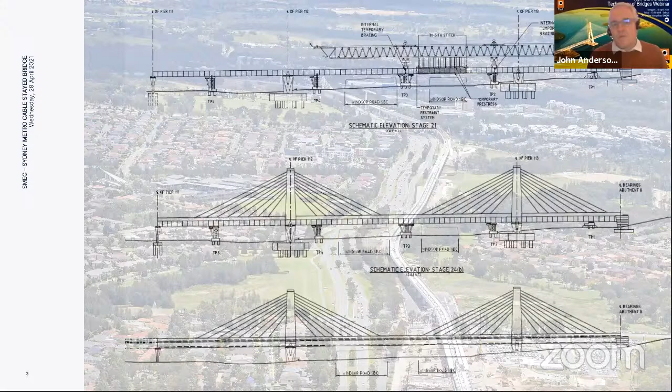The cable stayed bridge is actually part of a much larger project. The clients in Sydney have developed, have extended the metro from the centre of Sydney out to the northwest, and the project at one stage was the largest civil engineering job in Australia, and it included tunnels and this viaduct, which is about 4.5 kilometers long, that leads up to the cable stayed bridge itself.

The approach viaduct to the cable stayed bridge is your normal simply supported spans and a number of continuous spans. They're 2.5 meter deep precast segments, and they're built with an overhead gantry. And the contractor actually used a fairly massive gantry that could allow them to construct the 3-span continuous system as well.

But the requirement for a long span crossing was actually an alternative in the design and build tender. Contractors had to price both the conventional structural system with the simply supported spans, and then also develop a long span option.

And the contractor that we worked for, one of their key strategic objectives was to build the cable stayed bridge using the same overhead gantry that was going to be used to build the simply supported span. And in the end, that decision was the winning factor in the tender.

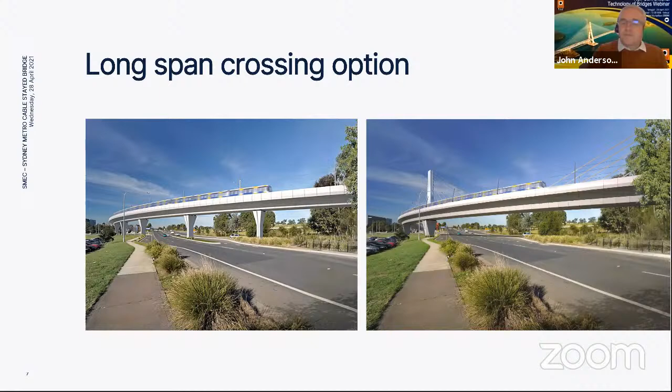So today I'm just going to go through some of the design challenges with the permanent works, and then also just talk a little bit about the construction sequence and how that actually informed design itself.

So general advice is perhaps stay away from cable-stayed rail bridges and stay away from curved cable-stayed bridges. This bridge combined both. There was no real alternative given the alignment of the rail was set. But with any rail bridge, you need a stiff deck, obviously, to limit deflection, to limit the rail stresses. And that could be a challenge with a cable-stayed structure, which generally has a flexible deck.

So the structural system is an extradosed bridge with a stiff deck, and that stiff deck helps you to limit the deflection of the bridge itself, and as I say, limit the rail stresses and the tolerances on the rolling stock.

Part of the performance objectives or the design requirements for the bridge was that the deflections actually had to be limited under rail loading to less than span over 950, which is fairly tight for any suspended cable-stayed bridge.

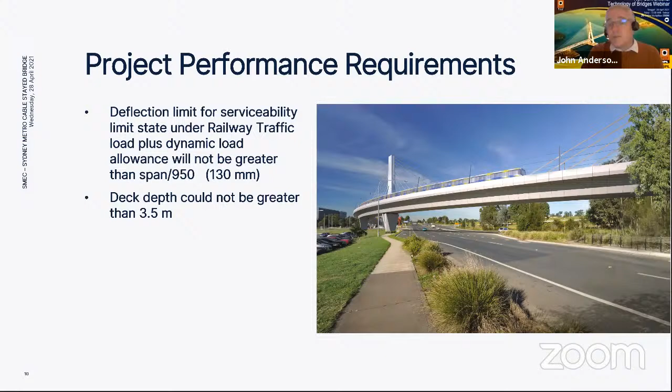The other big constraint we faced was from the urban designers, and the need to limit the deck depth to 3.5 meters. Given it's a busy urban area, they wanted to limit the visual impact of the bridge itself. But this constraint proved very difficult for the designers, mainly because of the magnitude of the rail load and the magnitude of the superimposed dead loads that you often get with rail structures.

So in a conventional cable-stayed bridge, it's the cable stays themselves that often provide the stiffness in the structure. Most of the load finds its way to the cables and to the pylon. You have local bending effects in the deck. So obviously that structural system is not suitable for a rail structure.

So with the rail structure, you have a much stiffer deck, but when you combine a stiff deck with cables, then the sharing of the load between the stiff deck and the cables themselves becomes a little bit more complex. Generally what happens is with these stiffer decks that you can build the bridge in such a way that the cables take the dead load of the deck, but when you apply live load to the structural system, the girder is far stiffer and therefore attracts the majority of the live load effects.

And typical span to depth ratio on a constant depth extradosed bridge would be span over 35. So for the Northwest Rail Bridge, that would be a deck depth of about 3.7 meters. So although 3.5 is relatively close, I think these limits are generally developed for road highway structures. And when you have rail structures, the live loading component is fairly onerous. And as I mentioned, the superimposed dead load was fairly onerous.

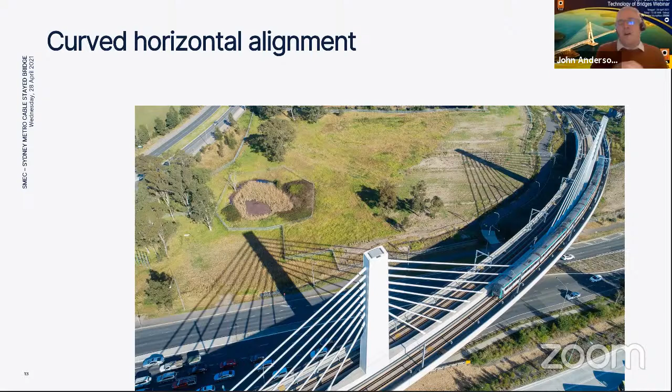So the cables followed the alignment of the bridge. They're therefore not in a single plane, they're splaying, and this introduces lateral horizontal reactions at the anchorages in the pylon, which then introduces a permanent transverse bending in the pylon. This is far from ideal to have this permanent effect within the pylon, and it becomes critical to limit the amount of transverse bending generated in that pylon.

Through the tender design process, we found that we were struggling to get the deck section to have sufficient capacity at ULS, and also to prevent tensile stresses developing in the precast segments at SLS. In a rail structure, you're required to maintain a minimum of 1 MPa across all joints.

And then the other challenge that we had was limiting the transverse moments in the pylon, and then limiting the transverse deflection of the pylon, because as it deflected, it introduced second order effects into that system and magnified those transverse moments being applied to the pylon.

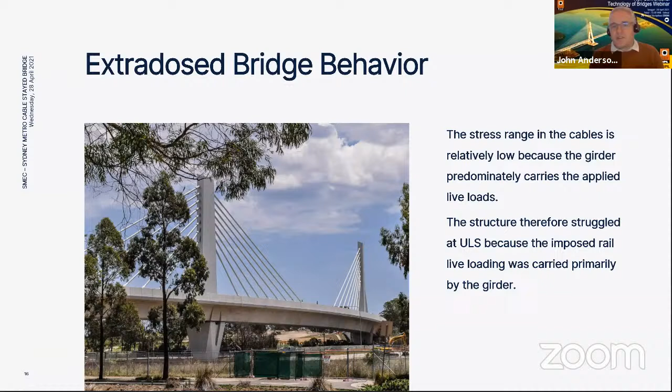Now, obviously, the stiff deck helps limit deflections, but the downside is it's also attracting load, and this became a real problem in terms of finding sufficient capacity within the deck section itself. So we had to find solutions for attracting more load to the cables and away from the deck section to actually get the structure to work.

This required a number of unconventional approaches, one of which was to increase the stiffness of the cable stays themselves, which essentially means using larger cables. By using larger cables, we attracted load away from the deck and towards the pylon. But that was a double-edged sword in some respects, because the more load we attract towards the pylon, the greater the transverse effects in that pylon.

There was a very definite limit on the amount of transverse load effects we could take in the pylon. Obviously, another way to get more load into the cable stay system is to increase the height of the pylon, but again that was counterproductive, because the higher the pylon, the larger the transverse bending moments. So we were stuck with this balance between attracting load to the pylon but not increasing the height of the pylon itself.

The first option we investigated was increasing the capacity of the box section. We weren't allowed to increase the height of the box section itself, so we came up with the idea of introducing a central web with a concrete fin that projected above the box section to give it some additional stiffness.

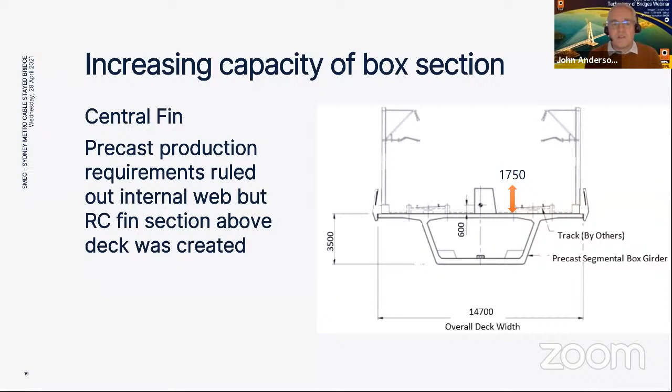But this was a design and build job, and the contractor was not keen on any solution that interfered with the precast segmental production cycle. This central web was obviously something that would do that. So in the end, we had to develop a solution where we had the fin projecting above the deck level, but got rid of the central web. The question then becomes, is that fin going to be effective within the section? Is it actually going to meaningfully increase the stiffness of the section?

The way we investigated that was with a brick model of the deck section, and what we found was that the fin was effective. It meaningfully increased the stiffness of the deck section.

The reason for that is when you have precast segmental construction, you're required to have compression across the joints. So the section itself was always in compression, even under live load effects.

This meant there were minimal shear lag effects within the deck section, and this isolated fin in the middle of the deck was actually fully effective and meaningfully increased the stiffness of it.

So this was a nice benefit of the precast segmental construction design process.

Another idea we had was to put the anchorage, the deck anchorage, the cable anchorage in the deck eccentric to the center line of the deck section.

We moved the anchorage 500 millimeters to the outside of the curve. What this did was reduce the overall resultant horizontal effects applied to the pylon, and therefore reduced the bending moments of the pylon.

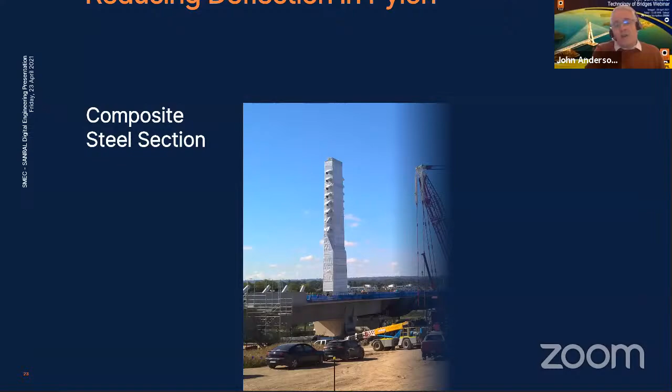Just to talk a little about the pylon itself: it was fabricated as a structural steel section, and this was done really for production reasons.

As we were building the girder, we could build the pylon. It's a 28-meter high section, and it was transported and erected on-site with this crane.

What we did is fill the bottom half of the pylon with concrete, creating a composite section. The big benefit of that composite section was its stiffness, as a composite steel section was far stiffer than a pure steel section.

That stiffness helped limit the transverse deflection of the pylon, and then helped limit the second order effects, which had a big benefit.

The fact that the transverse bending moments were permanent effects meant there would be some concern about just using a standard concrete section and the creep of that concrete over time.

Those concerns were allayed by essentially using a steel section, and then the stiffness of that steel section was augmented by filling the bottom half of the pylon with concrete.

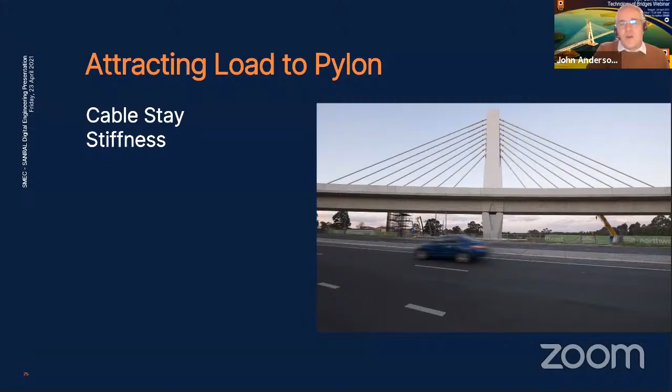Just to go back to what I mentioned about changing the cable stiffness and how that affected the behavior of this extradosed bridge: during the design stage we did a sort of optimization study looking at the impact of increasing the cable area.

The largest cable stay you can get is a 185 strand cable, a fairly massive unit, so the first option was just to use the largest cable we could.

Then we looked at a second option, reducing those cables down to 169 strands just on the outer two cables, which take most of the load, and reducing the size of the remaining cables that fan towards the pylon.

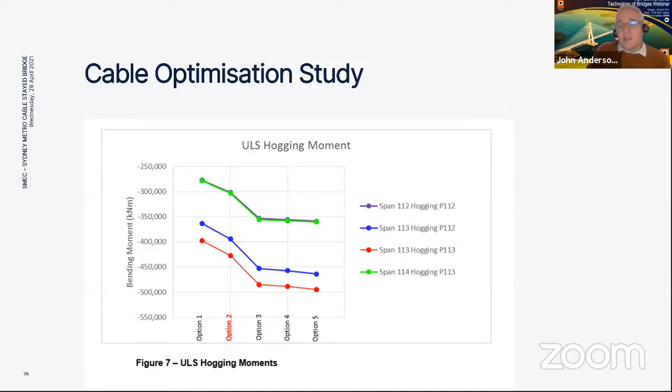So I'm now just quickly going to go on and talk a little about the construction and erection engineering, because that informs so much of the design—the way we built it really drove the whole detailed design. Just to familiarize yourself, because I'm going to show you a number of slides in terms of how we built it.

We've got the main piers, Pier 112 and Pier 113, and then the pier adjacent to the main viaduct, 111. And then those TP1 to TP5 are the temporary piers that we introduced while we were building it.

These temporary piers were instrumental in allowing us to use the overhead gantry. Obviously the gantry's got to jump from one hard spot to the other. By using these temporary piers, we were able to build the continuous girder with the precast segments first, and then later converted into the cable stay bridge. You can see the sort of Windsor Road clearance envelope there.

During the construction process, the road remained open. We lifted segments at night and only closed the road for a limited period between 12 and 4 o'clock in the morning.

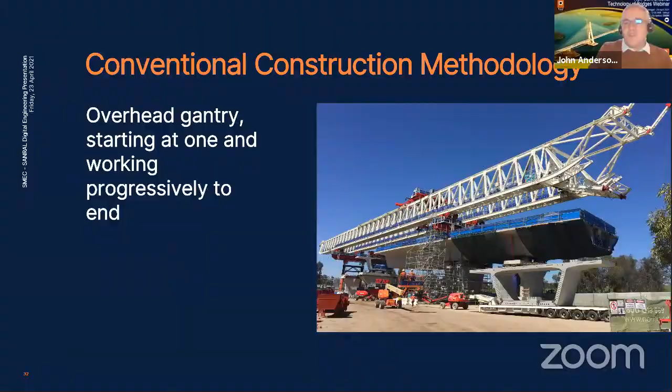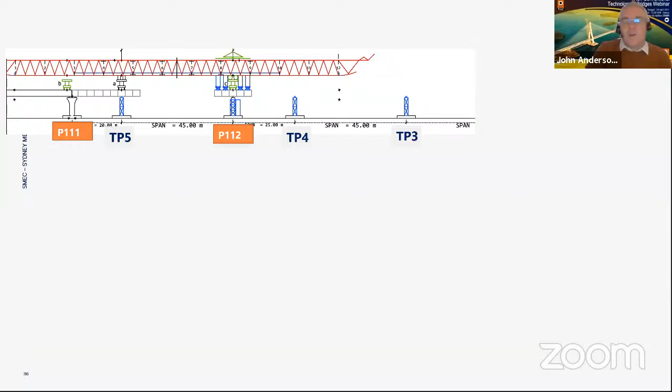So there you go, Pier 111 at the end of the main viaduct. The gantry jumps forward onto those hard supports. You have infill segments on either side of TP5, and then the gantry jumps and creates a small cantilever section at Pier 112, the length of that cantilever being set by the length of the temporary span. Then you have your infill sections, and that section progresses forward. Again at TP3, you have a small cantilever set by the length of the span between TP3 and TP4, with infill segments, etc. The gantry can progress from one end to the other.

Now, we tried that, but what happened was that the pre-stress you need for the construction stage proved detrimental in the final stage. The fact that we were building these small cantilevers, putting the pre-stressing in, and then subsequently converting the bridge into a cable stayed bridge meant that we had undesirable peaks in the pre-stressing—higher compressive stress and lower, and tension in the deck section. So there was no way we could start at one end and go to the other.

We had to find a different construction method that mimicked the behavior of the permanent works rather than the temporary state, because there was no way that we could detension. So I'm going to run through this very quickly.

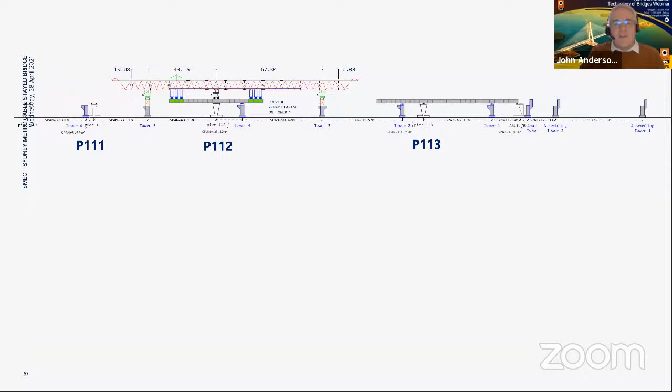In the end, what we did was start at Pier 113 and build a very long cantilever to start with, getting the pre-stressing in for that. Then we finished the back spans and drove the gantry back across the road. We then built a very long cantilever at Pier 112, finished the back spans, and then came across and finished the main bridge. The big benefit of that was the pre-stressing needed for these long cantilevers was effective in the permanent state when we converted the bridge into a cable stayed bridge.

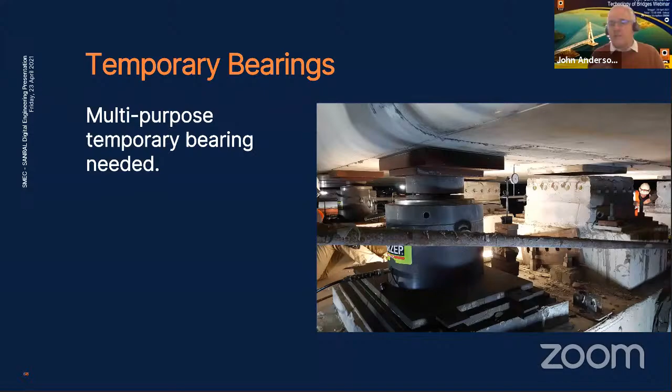Just a little bit of insight into the construction engineering, very complex, over 110 construction stages. During that construction, the bearings had to be multi-purpose. They had to be fixed, they had to slide, so they had to change their function. What we did is we had jacks sitting on sliding pads, and we created these plinths, with plates bolted to the underside of the deck that could clamp around the plinth. So we could have it fully fixed longitudinally or fixed transversely, changing the functionality of those temporary bearings relatively quickly.

Just going to skip that. So the fin itself was quite a complex element. Because it's quite a narrow element, it attracted peak tensile and compressive stresses, so it was packed with reinforcement, and we had to use self-compacting concrete.

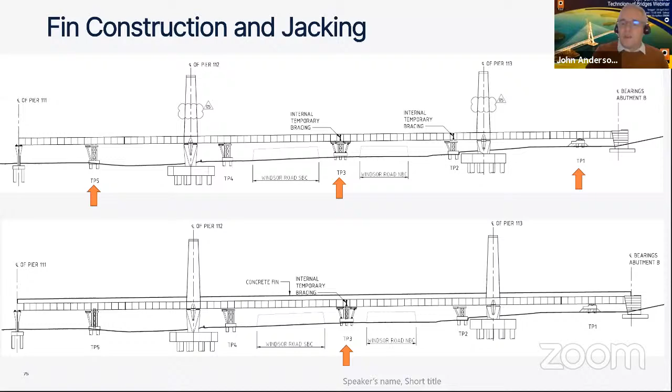But one thing we had to do was, because it was reinforced and the rest of the deck was precast and pre-stressed, we had quite a big stress differential in the composite section. So we had to jack the deck upwards before we cast the fin to improve that stress profile, and then after we cast the fin, we jacked the deck up again so that we got relieving effects in the fin. One important point is, with the extradosed bridge, you cannot change the geometry by stressing the cables. The only way you can do it is by jacking the deck up and shortening the cables.

This jacking operation also had big benefits in that it was one way we could increase the reaction at the temporary support, and by doing so, we were able to get more load into the cable. That became a big part of our construction methodology.

So in the end, it looks a very simple bridge, but its construction methodology made it actually very complex. We're very proud of the way the bridge looks, and its complexity is sort of hidden within it. So that's everything. Thank you very much.

Thank you very much, John. It's really interesting. As you mentioned, it looks like not so much technology sophisticated in terms of the span, because it's not too long, but in terms of complexity it's really, I don't know what to call it, a cable-stay hybrid, because this is the hybrid between the cable stay and the precast concrete put together. Very interesting. So John, we will hold all the questions later on after all the speakers finish with the presentation.

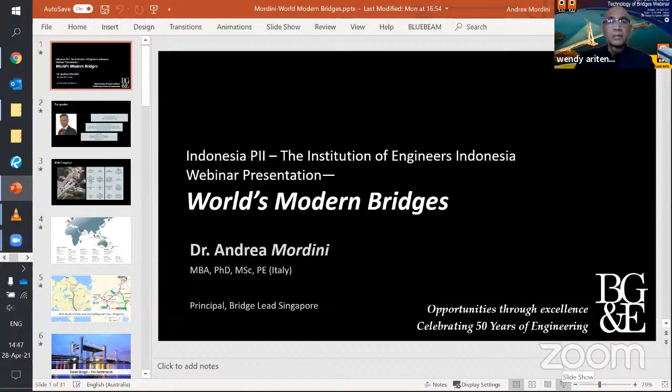Okay, thank you. First of all, I want to thank Mr. Chairman, Mr. Bang Bang, and the moderators, Mr. Aritenang and Bibi, you will forgive my pronunciation, and a special thanks also to the Institution of Engineers in Indonesia for giving me the chance to present some of my experience in bridge engineering and construction.

This is me. I'm originally Italian, and I was lucky enough to have experience in interesting projects in a number of countries. I will take you today on a trip, and I will show you three different bridges, each with different challenges. I'm currently based in Singapore, where I lead the bridge team for BG&E, International Consulting Engineers.

A couple of words about the company. BG&E is an Australian-founded company, and nowadays we have accumulated more than 50 years of experience, and we count more than 700 employees. Of these, about 150 are bridge engineers. We are originally an Australian company, but we have expanded our international footprint with 11 international offices, from London, Middle East, Singapore, and then of course our stronghold in Australia, all the way to New Zealand. We are also active on the Indonesian market, currently with some projects, and we went through the local registration process.

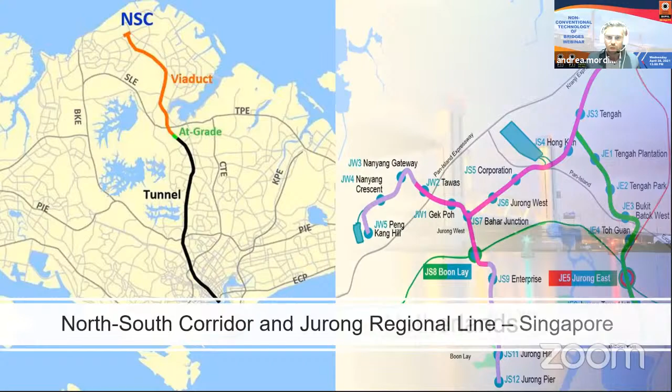The Botlek Bridge is one of the largest movable bridges in the world. We are talking of two steel decks with a span of 92 meters, for a structural steel weight of 3,600 tons each. Each deck can go up in the air about 45 meters.

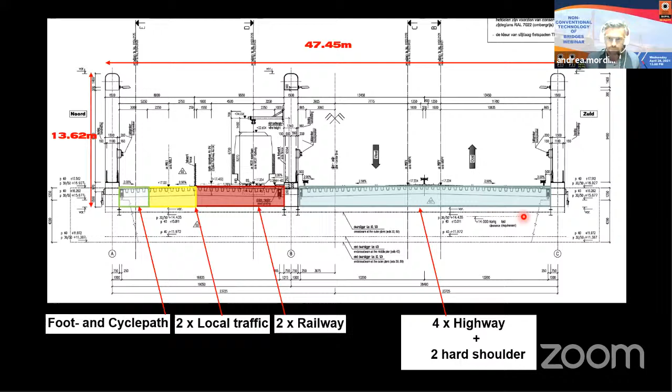Some other challenges I can mention: the bridge was designed and built with a mix of national codes and the Eurocodes. It was necessary to integrate different requirements from different stakeholders - the owner of the waterway, the owner of the highway, the owner of the railway. We also had very strict requirements regarding reliability, with high non-performance penalties in the range of 100,000 euros per 50 minutes per lane.

So if you close a lane for 50 minutes, you have to pay 100,000 euros, and there's a quite short opening and closing time of 90 seconds, which may look long, but when you have to move 5,000 tons of permanent weight up in the air, I'm sure the mechanics behind it, the M&E component, is quite challenging.

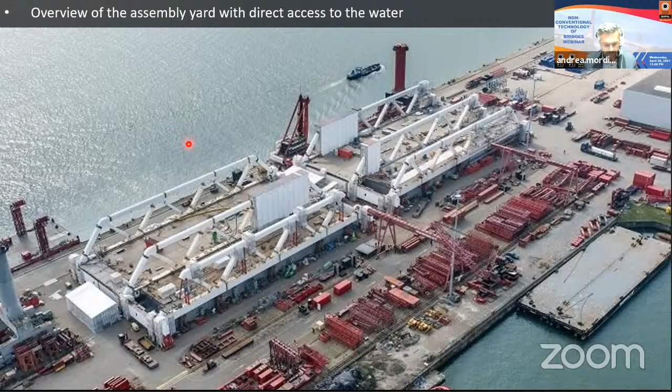And the importance of this, I will try to show you now in a video. Let me try to get out. Okay, I have the video ready here.

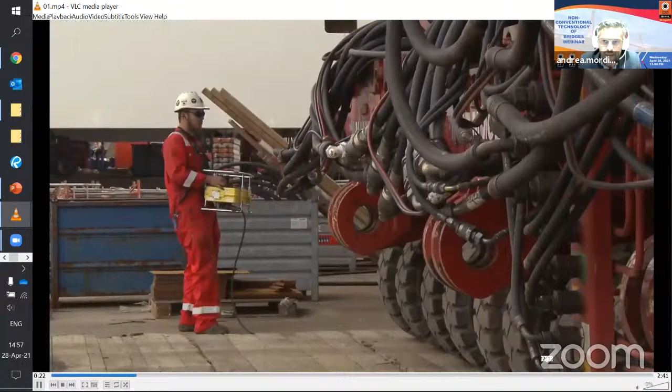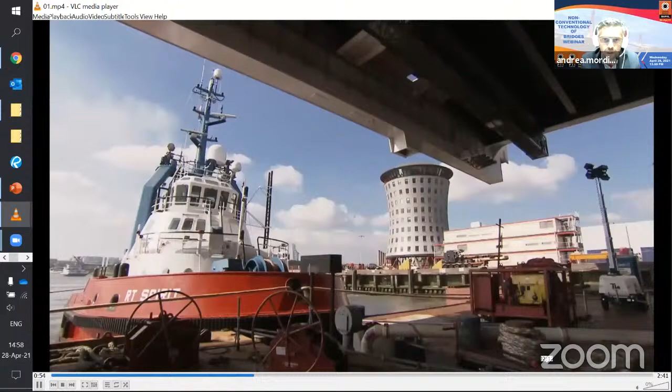This is the deck that has been completed and assembled. As a first step, it has been jacked up, and a multi-wheeler has been slid under it. Then slowly, the deck started moving towards the water, where a barge was located. The operation was very slow because the barge has to compensate for the load coming in from the deck—this is, of course, a time lapse. Now the deck is fully on the barge, and the barge can move towards the end destination, which is just a few kilometers away.

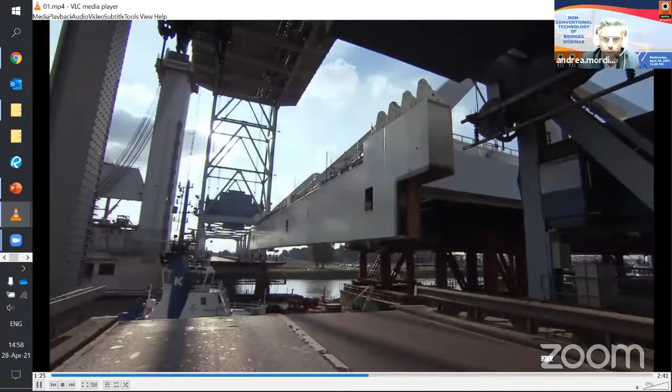Before being installed, there is another challenge: the deck has to pass through the old bridge, which has a smaller span than the previous one. So the old bridge is opened and the deck is moved past through. It's a quite complicated operation, considering the clearance on both sides is less than 500 millimeters. Even a part of the bridge—an edge—is missing, as you'll see, and it has been installed afterwards.

Now the deck is fully on the other side, and it has been rotated, and now it is in position, ready to be installed in its final position—another quite watchmaking operation, fitting half a football field between the piers.

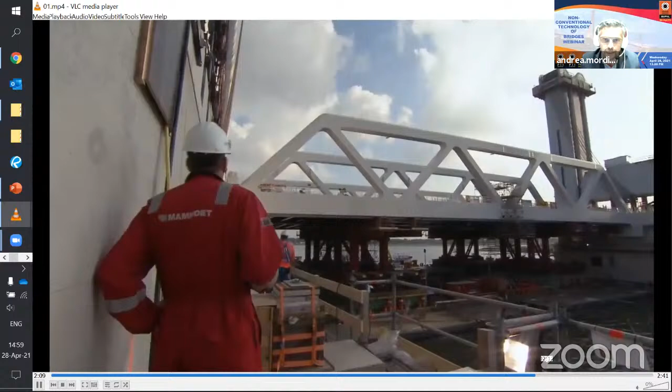You see here that an edge of the deck is missing—those are the latches to connect to the cables, because there was a very limited time window to perform this operation, and then immediately the deck has to go up in the air to free the waterway.

And yeah, this is the completion of the operations. Let me go back to my presentation. After the installation, there was a testing period. You see here both decks are up in the air with some ballast, because the full permanent load must already be on the deck, because of the full balance system. And this is the completed bridge as it is today.

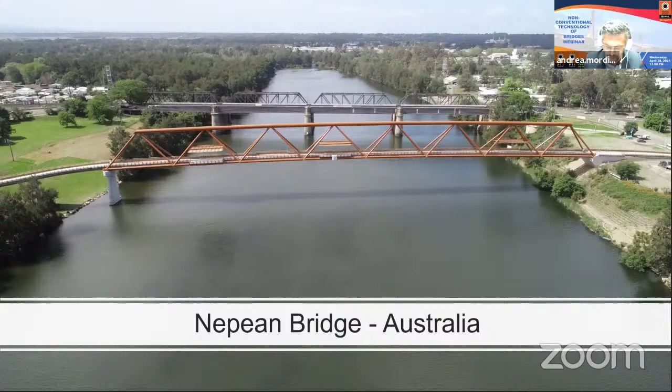After this movable bridge, we fly all the way to Australia. We talk of the Nepean Bridge. The Nepean Bridge is a shared path, cyclist plus pedestrian bridge. It's part of the Great Western Highway project, and in this case, BHNE was the detailed designer for the authority.

To overcome some constraints on the site, we developed a quite interesting concept for the launching. The bridge has a clear span of 200 meters, and it is a truss bridge. We know that trusses work well when they are supported at their nodes. But this is exactly the opposite of what happens when you launch a bridge, because when you launch a bridge, the deck is supported at each and every point in a different moment as you slide the bridge.

So to avoid this unfavorable load support configuration, BHNE has developed a system whereby the deck is supported at the node, and instead of sliding the deck with respect to the support, the support will be fixedly connected to the deck at that point, and the support itself will slide on the tower. It's not by chance that the length of the tower is exactly the distance between two nodes, and also the distance between the towers in the river is actually exactly the distance between two nodes.

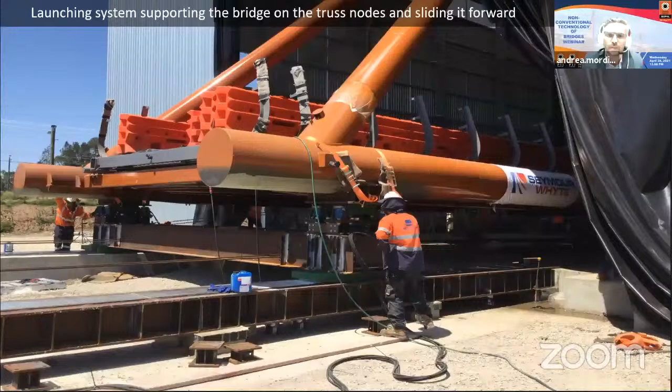Let's have a closer look at this system. This is the first segment that has been launched, and you see the system works like this: here we have jacks to engage this bearing, and this system of bearing and jacks will be fixedly connected to this node. Then the bearings are connected to this crossbeam, and the crossbeam will slide on this rail. Same view from another perspective of the same system.

This is the end of the launch—we are at the last segment—but this mechanism is repeated all along the bridge for the entire 200 meters.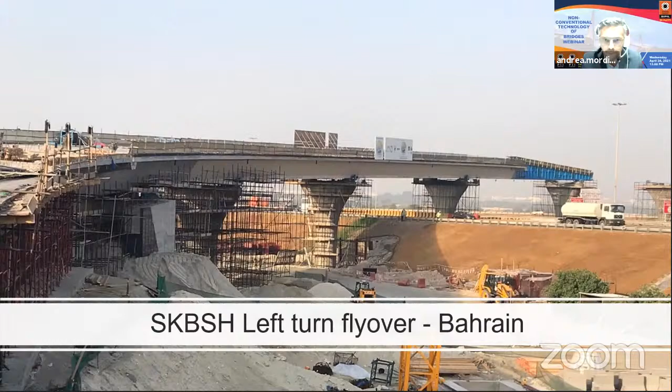14 total number of spans. VCE in this case has performed the detailed design of the bridge and the casting yard, including the geometry segmentation and the construction engineering during launching.

I want to focus for a moment on the segmentation part, because the geometry of the bridge is actually very complicated, as we have a double curvature. Of course we have a curvature in plan, as you can see on the left side, but we also have another curvature in elevation, because the flyover starts with a low point, goes all the way up, and then goes down. So this is the geometry in the 3D view of the alignment, and this has been translated into the geometry of the deck with multiple cross-sections taken along the alignment.

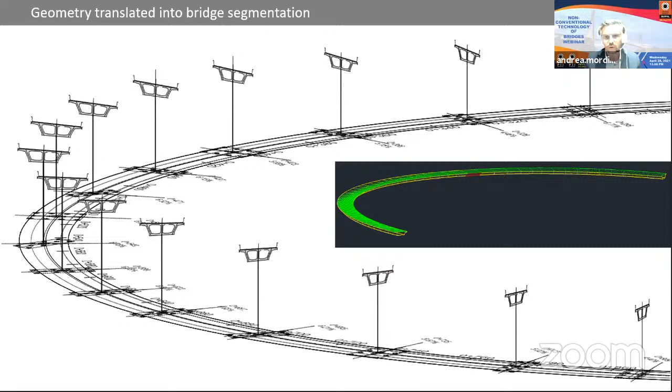If we look more into the cross-section, we have to notice a couple of things. The first is that the client dictated a variable crossfall on the ramp, and this means that it had to be taken into account already in the casting yard. To obtain the final right geometry, our drafting team had to prepare one section for each meter to provide the longitudinal variation of the crossfall.

The other thing that the client dictated was the use of a double cell. You can see that the width of the deck is quite conventional, and the width of the cantilever is not extreme. We actually recommended the use of a single cell, but the client wanted to use a double cell, partly justified by the very strict requirement we had to apply, since a crack width of 0.1 millimeters was adopted for this contract, which is quite strict.

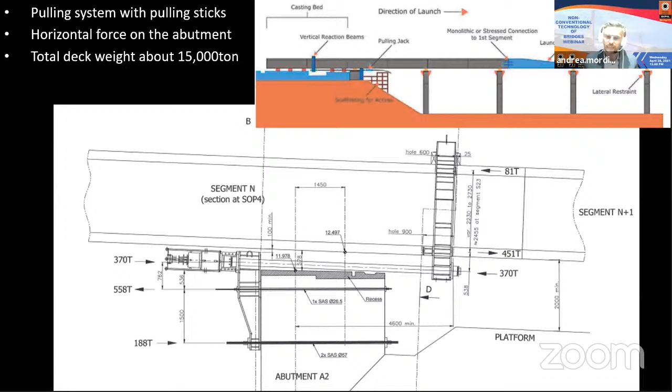What happens is that the jack pulls on this side, and through these tendons, the pulling force is transferred to the pulling sticks and then toward the deck. Of course you have a relevant force introduced into the abutment, and as depicted here, also a relevant push and pull action inside the top and bottom slab of the bridge.

And since we have a launching system, there is something moving, so let's try to have a look again at the video.

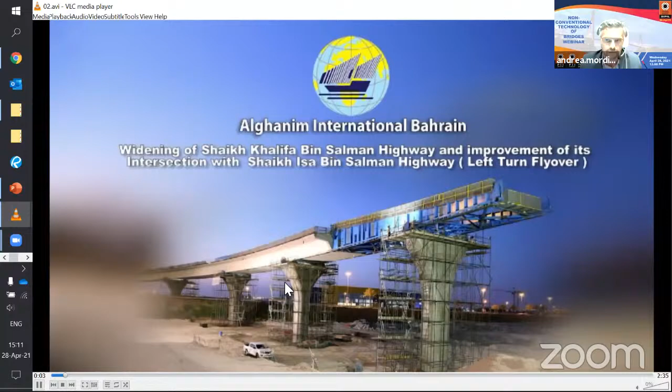All right, here is an overview of the site. The launching operation started usually in the evening and was performed during night. This, of course, is not the first segment. You see that the earlier part has already been launched.

This is a close view of the jacking system, and you see that the launching is performed above live traffic. Here are the last measurements and checks before the beginning of the operation.

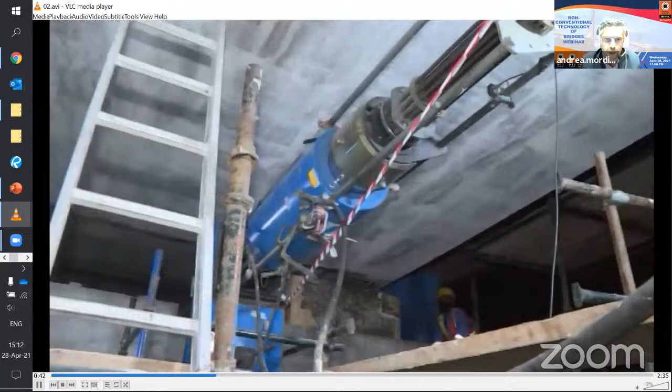Here is a closer view and preparation of the pulling system. And finally, we start. You see that the jacks are pulling and the bridge is moving on top.

Once the stroke is completed, you see that the tendons will become sagging. This is an overview of the pulling stick coming down from the top of the deck, and you see the bridge moving. This is a temporary bearing, the temporary support in the casting yard.

And here, if you focus on the bridge, is a time lapse. You see the bridge moving step by step. Of course, it's not a continuous movement, but each time the bridge will move according to the maximum stroke of the jacks.

Here is some other time lapse. You see the bridge is still advancing. Here you have another step, and the operation went on and on for several hours. You see now it's already early morning hours, and the operations are nearly completed.

And here you are now, it's a full day, and this is the final configuration of the bridge for the casting of this specific segment.

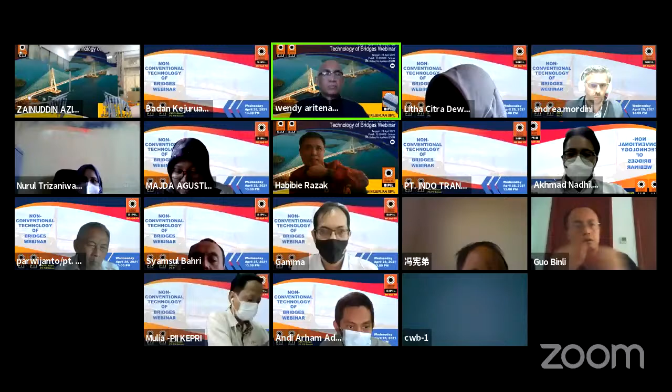Mr. Guo Binli, are you still muted? Now it's okay? Now we can hear you. Okay. But now we don't have your presentation yet. Just a moment, we'll share the screen.

The Arkadiko Bridge in Greece is the existing oldest bridge, with a history of about 3,000 years. Zhaozhou Bridge is the oldest bridge in China now. Luding Bridge in China is the first 100-meter scale bridge in the world. And the George Washington Bridge, USA, is the first 1,000 meter scale bridge in the world. We all know that there are four basic bridge forms.

Mr. Guo Binli, you're still muted. Because it looks as if we have a connection problem with you, because we cannot hear you and it's interrupted many times. So I would like to suggest that we continue with more speakers while you try to fix your connection problem.

Oh, he's already here. Oh, you're already here? Okay, the slides are already shown. Okay. Sorry, some problem with my net. Yeah, please continue. Okay, now let's continue.

This table shows the top 10 long span concrete span bridges, and there are 4... there are 5 bridges in China.

The second is about arch bridges. Arch bridges have a history of over 3,000 years. This is the evolution of the longest span of arch bridges. It can be found that the longest span only increased 14 meters from 1931 to 1977, but it increased rapidly in recent years.

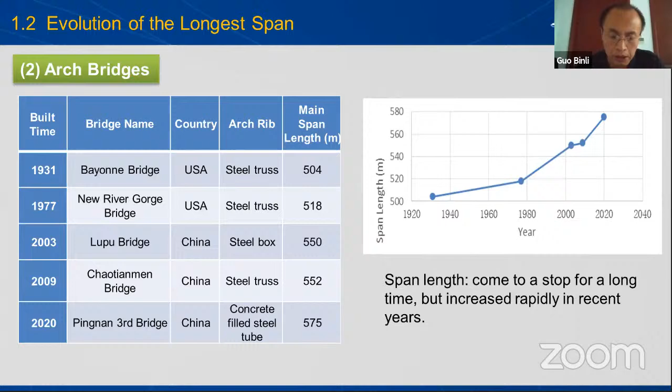The third one is about suspension bridges. The suspension bridge is an ancient bridge form, but the long span suspension bridges were developed with the increase of material performances of steel after the late 19th century.

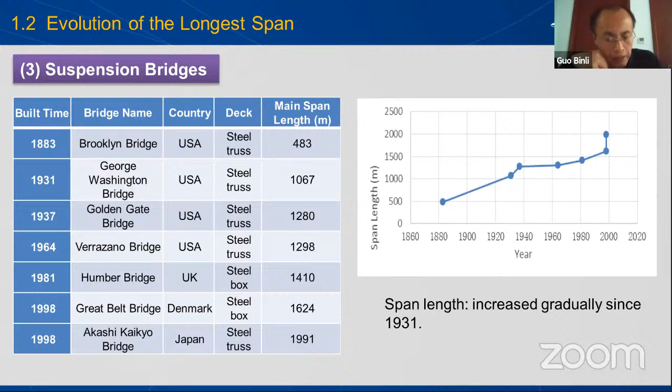This is the evolution of span lengths of suspension bridges. It can be found that the longest span reached over 1,000 in 1931 and increased gradually since then. And the table is the top 10 long span suspension bridges.

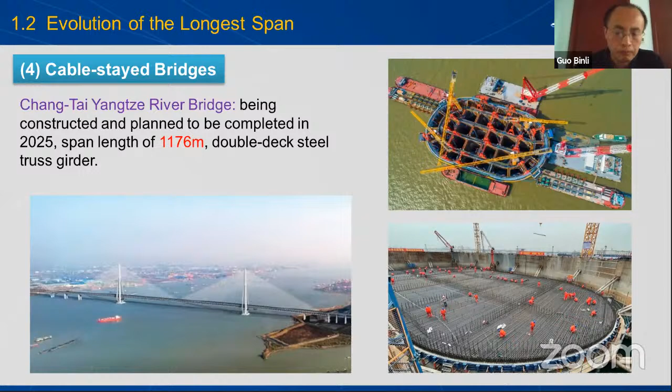Part 2 is challenges and the engineering approaches for longer spans. First, talk about beam bridges. For beam bridges, the maximum negative bending moment will control the longer span.

And we can also adopt concrete and steel hybrid girder. Shibanpo Bridge in China, the old bridge is a PC continuous rigid frame bridge. Besides the old bridge, a new bridge is built, and the maximum length is 330 meters.

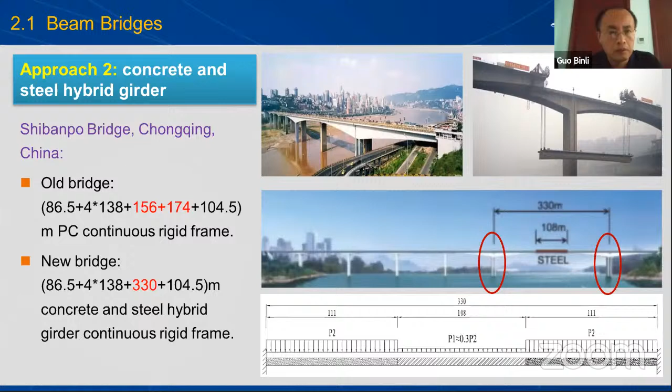Another approach is adopting the extradosed cable stay bridge. The extradosed cable stay bridge is a hybrid between beam bridge and the ordinary cable stay bridge. With the help of steel cables, it can reach longer span with smaller girder depths.

The second bridge type is arch bridges. One challenge here is the buckling stability of arch rib for longer span. With the increase of span length, calculation length, and compressive stress of arch rib shows the increase with span length. Especially for both general and local stability, it is not good.

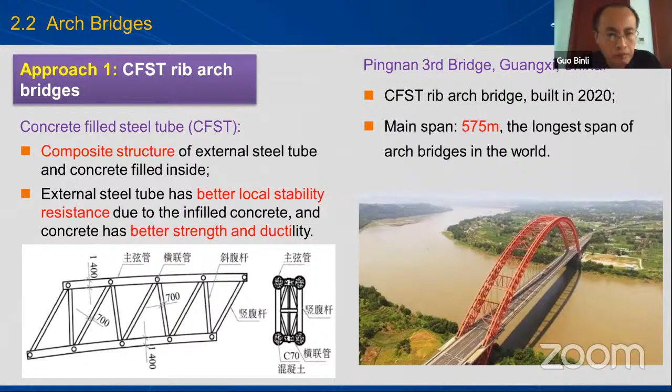Its construction includes first cantilever installing the steel tube rib with the help of temporary steel cables to form the steel tube arch. Then fill concrete into the steel tubes in batches to form the concrete-filled steel tube composite arch. Then construct columns, suspenders, and decks supported by the arch rib to form the concrete-filled steel tube arch bridge.

Another approach is concrete-filled steel tube stiffened concrete rib arch bridges. CFST stiffened concrete was first used in China as the stiff skeleton to build concrete arch bridges.

The picture is the Beipan River Bridge in Guizhou, China. It was built in 2015. Its max span length is 445 meters.

Construction of the steel stiff skeleton. They fill concrete in the tubes to form the concrete-filled steel tube stiff skeleton. Then install formwork supported by the CFST stiff skeleton. Then cast concrete of the arch rib to form the composite arch rib. The last step is to form the concrete-filled steel tube stiffened concrete arch bridge supported by the arch rib.

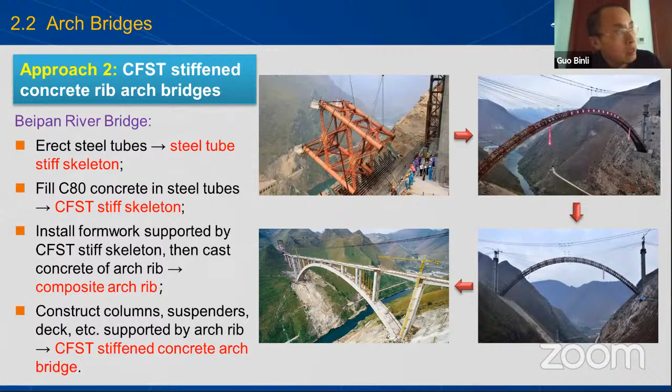Tian'e Longtan Bridge is now being constructed. Its main span length will be 600 meters. It will be the longest span arch bridge after completion.

Another challenge for the suspension bridge is wind resistance stability. Long span suspension bridges, which have poor structural stiffness, will vibrate easily in wind circumstances. The Tacoma Narrows suspension bridge collapsed due to wind in 1940, leading to some aerodynamic measures, for example guiding plates, coupling plates, rectifying plates, and vertical and horizontal stabilizers.

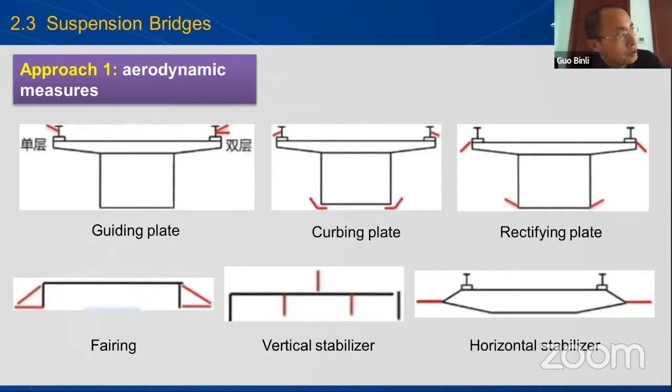Aizhai Bridge in China is a steel truss suspension bridge. Its main span length is 1,176 meters. According to wind tunnel test results, the steel truss without aerodynamic measures cannot satisfy the demands of flutter-checking wind speed, so vertical and horizontal stabilizers were adopted in the bridge.

Nansha Bridge is an integral flat steel box girder suspension bridge. Its main span length is 1,688 meters. After repeated wind tunnel tests, it was found that the horizontal stabilizers arranged outside the wind fairings have an apparent effect on the flutter stability of the box girder.

Another approach is separate steel box girders. For Xihoumen Bridge in China, the main span length is 1,650 meters. Its flutter critical wind speed is very high, exceeding Grade 17 typhoons, so separate steel box girders are first adopted in the world. The wind pressure difference between the top and bottom surfaces is cut down by air convection through the opening between the two box girders, thus having good wind resistance performance.

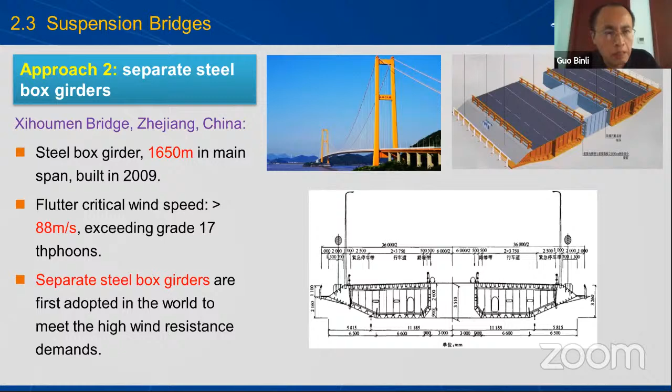The third approach is adopting central buckles for the main cables. For Runyang suspension bridge, whose main span length is 1,490 meters, dynamic characteristics without and with rigid central buckles for main cables are compared. It can be found that central buckles increase the stiffness and corresponding frequencies of the bridge.

The fourth approach is using external dampers. For Xihoumen Bridge, vertical dampers are arranged between the north tower and the girder in the aeroelastic model test. Test results indicate that external dampers can increase the damping ratio of multiple vibration modes effectively, avoiding vibration control issues.

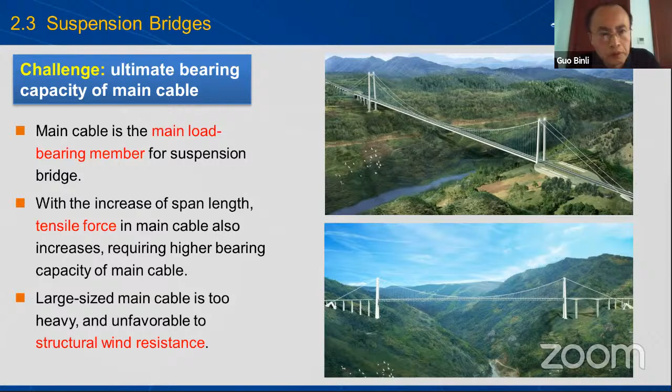The approach is using steel girders or steel-concrete composite girders. For long span cable-stayed bridges, steel girders or steel-concrete composite girders are light, thus able to span longer lengths and reduce material consumption of cables, towers, and substructures. This table lists the reasonable span lengths for cable-stayed bridges with different girders: for concrete girder, the span is generally 200 to 400 meters; for steel-concrete composite girder, it's around 350 to 550 meters; for steel girder, the span length is generally more than 450 meters.

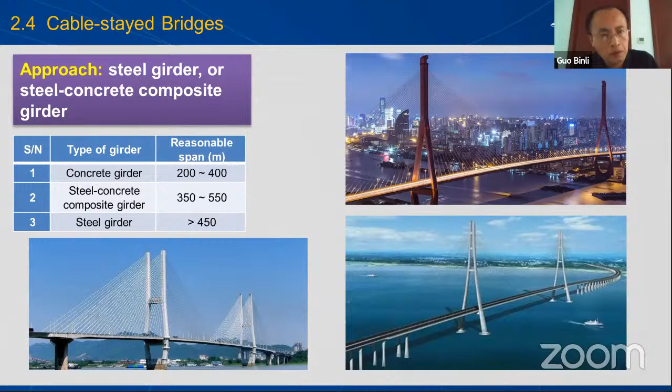Suramadu Bridge in Indonesia is a cable-stayed bridge with main span length of 434 meters; its girder uses the steel-concrete composite girder. For Nanjing Second Yangtze River Bridge in China, the main span length is 628 meters, so an integral flat steel box girder is adopted.

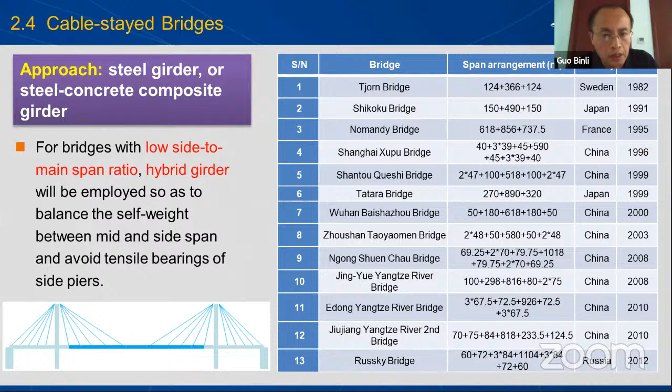For some bridges with low side-to-main span ratio, hybrid girders will be employed so as to balance the self weight between side and main spans and avoid tensile bearing issues at side piers. The table lists some cable-stayed bridges with hybrid girders. For Edong Yangtze River Bridge in China, the main span length is 926 meters, and the side-to-main span ratio is 0.3.

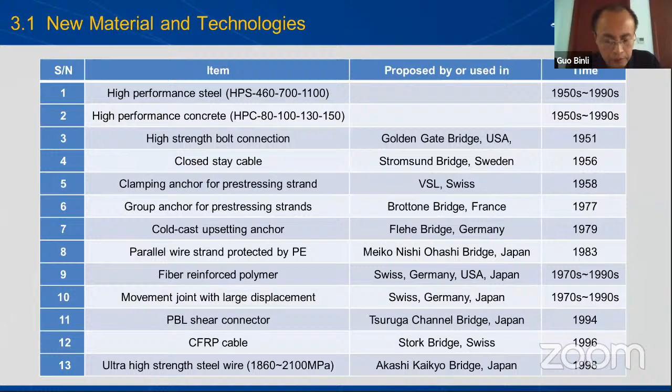The third part is technical innovations of long span bridges. First, the new materials and technologies. Then some new structures.

For new bridge types and structure systems, for beam bridges, we introduced some concrete and corrugated steel web composite beam bridges. It is lighter and it has better seismic resistance performance.

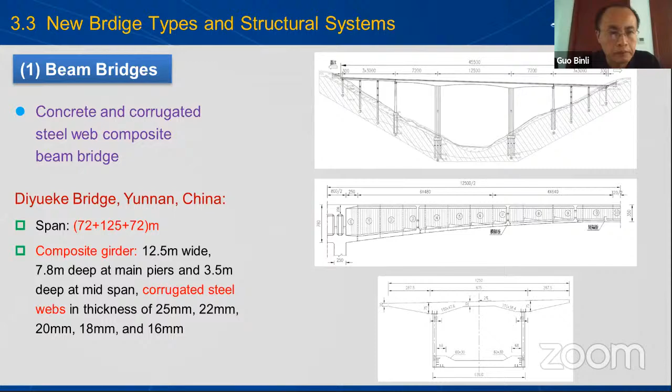For the Diyueke bridge in China, the corrugated steel web composite beam bridge was used, with a main span length of 125 meters. For the arch bridge, the Zhijinghe bridge in China has a main span length of 430 meters. The deck type concrete filled steel tube arch bridge is used for this bridge.

For suspension bridges, the self-anchored suspension bridge is a new structure type. The Songyuan Zhenhe Bridge has a main span length of 266 meters.

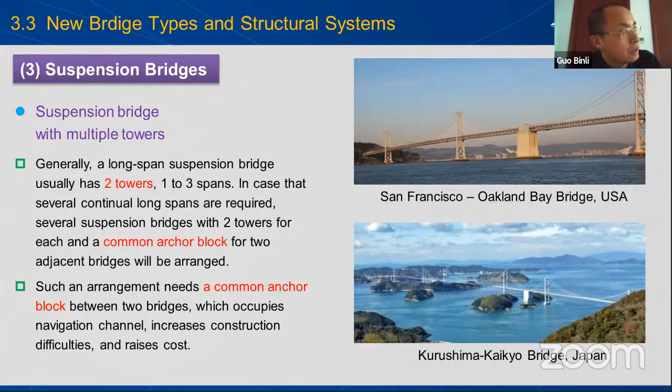There is also suspension bridge with multiple towers. For such suspension bridges with more than two towers, it is different from the two-tower bridges. For the Taizhou Yangtze River Bridge, it has three towers and two main spans.

For modern cable-stayed bridges, the Changmen Bridge has a main span length of 550 meters, and we adopt the consolidation system. It is the second longest cable-stayed bridge of this structure system in the world.

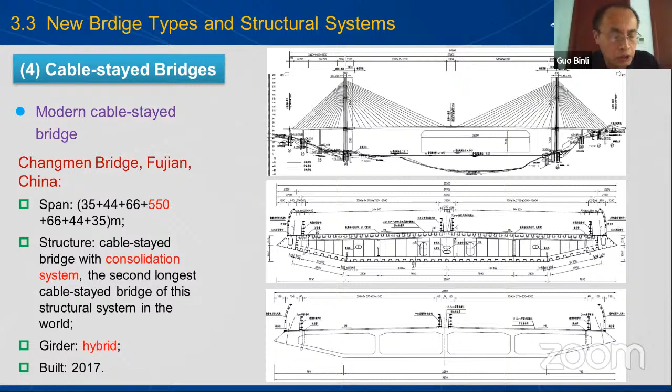In the combination system bridges, including cable-stayed and rigid frame combination bridges, and cable-stayed and suspension combination bridges, there are also some new construction methods.

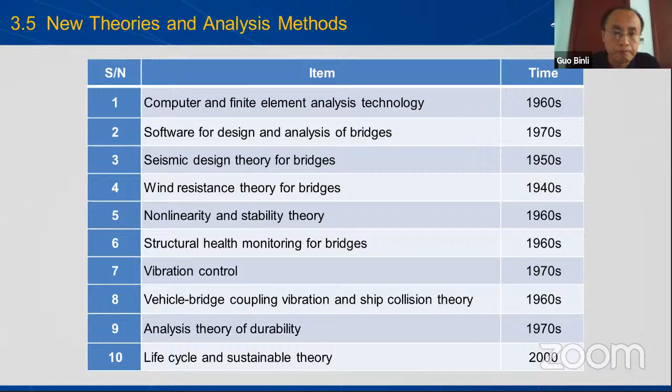Last, the new theories and analysis methods. The last part is about the prospective development of long span bridges.

What's the longest span? I think that the span length of bridges will increase in the future. For the arch bridge, 800 meters. For cable-stayed bridge, 1,500 meters. And for suspension bridge, 4,000 meters will come into being in the near future.

The second point is about building materials with better performance, including high performance and light weight material. For design, performance-based design theory, automatic drawing, fast optimization, and numerical simulation.

Also, robustness of bridge structure will be more important in the future. For construction, including industrial manufacturing, assembly construction, intelligent construction equipment, larger and heavy duty construction equipment, rapid construction, and 3D printing.

In fact, for the Nanjing Fifth Bridge, a cable-stayed bridge, more than 80% of the works was finished in the factory.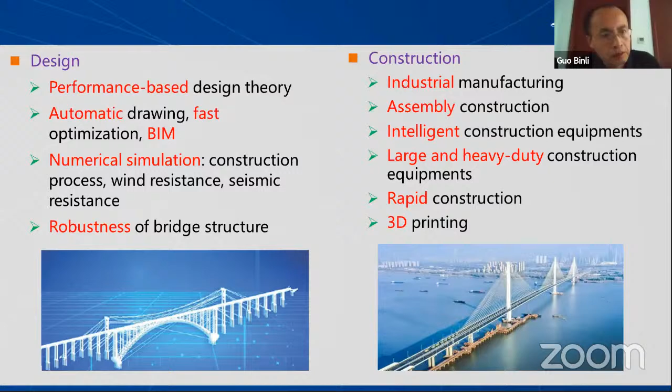Then maintenance and repair, intelligent detection, automatic monitoring, intelligent solutions. Okay, that's all, thank you.

Thank you very much, Mr. Guo Binli. I believe there is so much high-tech bridge construction in China, because we know that your technology in China is very advanced.

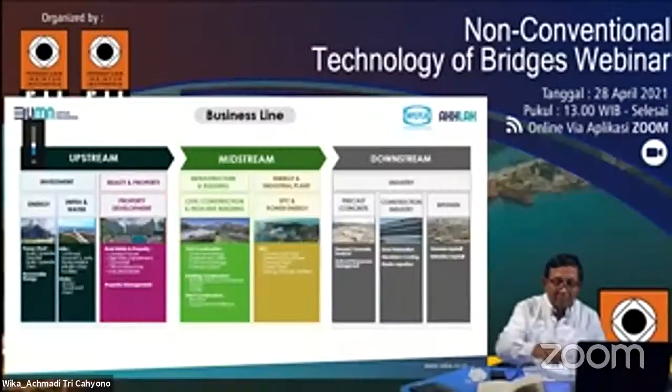I think we're going to cover the business lines of Wijaya Karya. First is upstream and midstream, and we also focus on the downstream. I will skip this one.

Ini bisa kelihatan ya, Pak? Ya, bisa. Okay.

So now related with the title of our presentation, special portfolio gallery of Wika, we want to show 3 iconic bridges which are already done or finished, such as Semanggi Interchange, and the last one now ongoing project is Alalak Bridge. In this presentation, I want to show WIKA's capability in project management and also leadership, because besides we focus on the technical solution for how to finish the project for bridges especially, we also develop leadership for the people of Wijaya Karya.

The first one is we want to talk about the Semanggi interchange. This is a very iconic bridge, Semanggi. This one is special. The previous one, Semanggi, was designed and built during the first President Soekarno era.

And now Mr. Jokowi wants to develop a new one, and most unique, for example, the bridge type is concrete box girder, and cost around 24.8 million US dollars. Especially for time, this is a very tight schedule, and the contract system is lump sum, design and build, meaning designed by Wijaya Karya, and also engineering, procurement, construction, and testing.

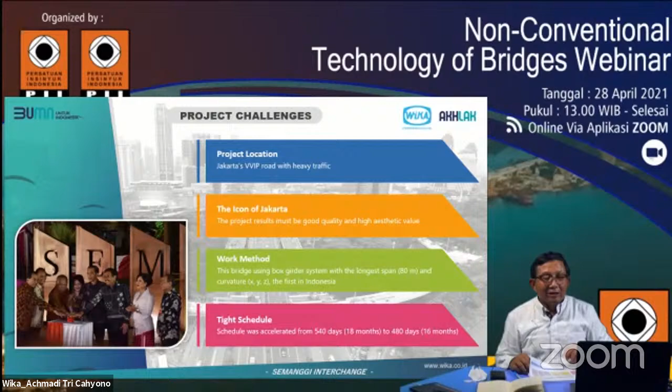Erection work of the concrete box girder is very unique, because we should be concerned about the banana effect, because part of the bridge is a curve type.

Erection work of the concrete box girder uses a semi-balanced cantilever system. The segmental box girder precast installation method combines the full span system with the cantilever balance system. The principle of counterweight for the erection span using the lifter is done first with the full span method, using shoring and crane tools.

So during the installation for the Semanggi Bridge, we focus on the banana effect. This part of the bridge is curved, which is very dangerous because of the centrifugal force.

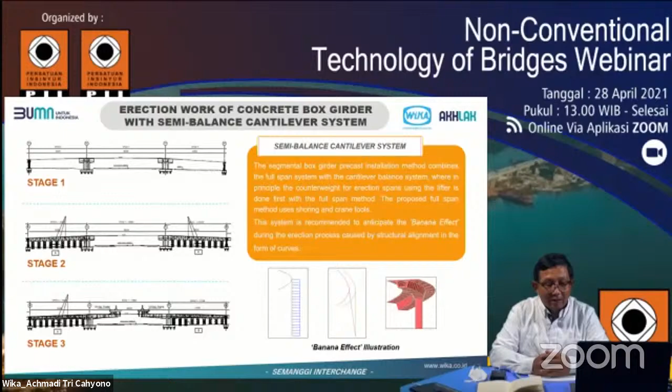Erection work of the concrete box girder combines construction using shoring, and also some pouring cast in situ, such as for the pier.

One of the challenges we should also consider is the utility under the existing site, because Jakarta's previous or existing condition is not managed well. So we should be aware of underground utilities. This is why during construction of this job, we should be very concerned about the cable lines, and we should use some equipment to identify what kind of underground facility exists, to avoid any possible problem such as electrical cables supplied by PLN.

The special one is when we talk about the V column work. One of the column models is like a V. So this column will work together once the beam is already installed and already concrete.

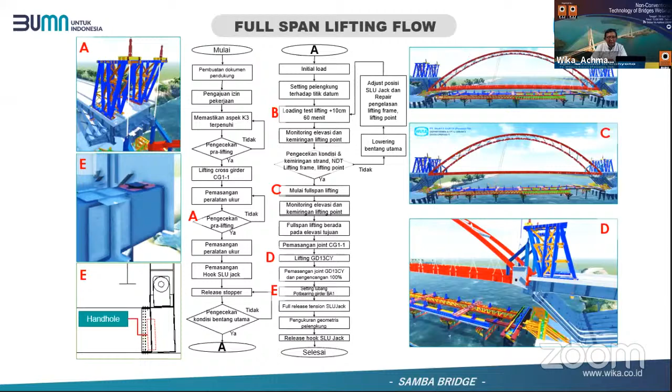Pak Achmadi, maaf ya, 3 menit lagi Pak Achmadi. Ya Pak, kenapa Pak? 3 menit lagi ya.